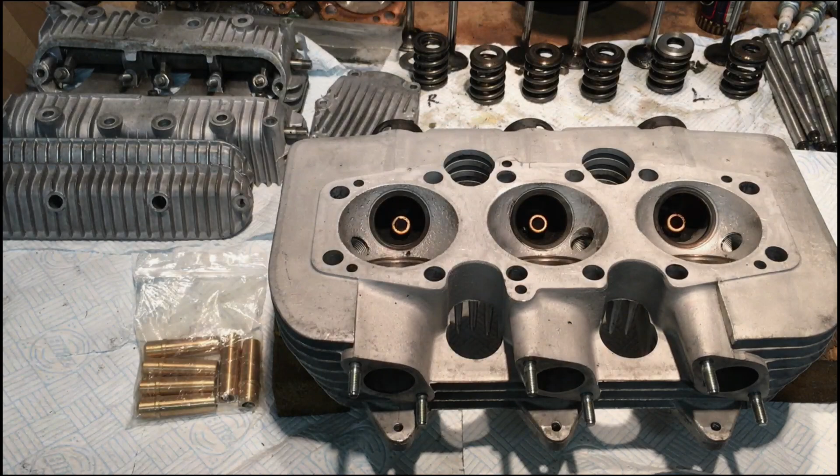Right, back on with the Rocket 3 top end rebuild, part 3. So on Friday the barrels went in to be rebored as recommended by Richard Darby, and the name of the company is Willenhall Engine Centre, at a place called Willenhall and Bilston in Wolverhampton, and they should be ready towards the end of this week. So in the meantime, we'll carry on with the head and rocker boxes.

So firstly, the rocker boxes and rocker covers have had a good bath in the ultrasonic cleaner, together with the sump plate. Actually, I took that off because the engine does sump, so we cleared all that lot out. And first thing we'll do tonight is we'll get some new valve guides into the cylinder head. So the oven's on at 200 degrees centigrade, which is about gas mark 8, I think.

And we'll put the valve guides into the freezer for the same length of time, and we've got sort of hammers and drifts ready to knock these out and hopefully get the others in, and hope that the old welding gloves will be good enough to carry this between the kitchen and the garage. Otherwise there's going to be disaster. And before you say anything, this has the full approval of my wife. So let's get on with it.

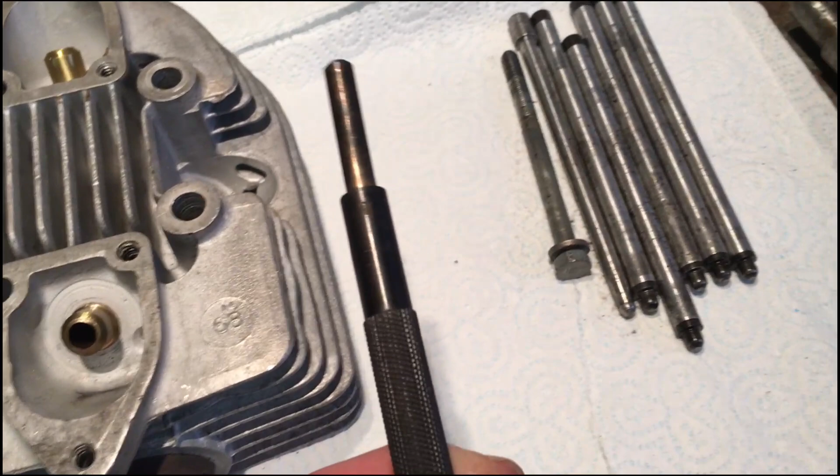Okay, that's the old valve guides out and the new ones in, but my god, they took some putting in. I heated the head to actually 240 degrees centigrade, and these took some welting out and in with, luckily, the proper drift, but you can see I've somehow slightly bent that, and the ends had a really good welt. They were tough. I've done plenty of cylinder heads in the past, including triples, but god, these were tight.

So what we'll do next is we'll just check these against the valve stems, because I've got a funny feeling that as these are so tight we might need to slightly ream these out, but we'll see how we get on.

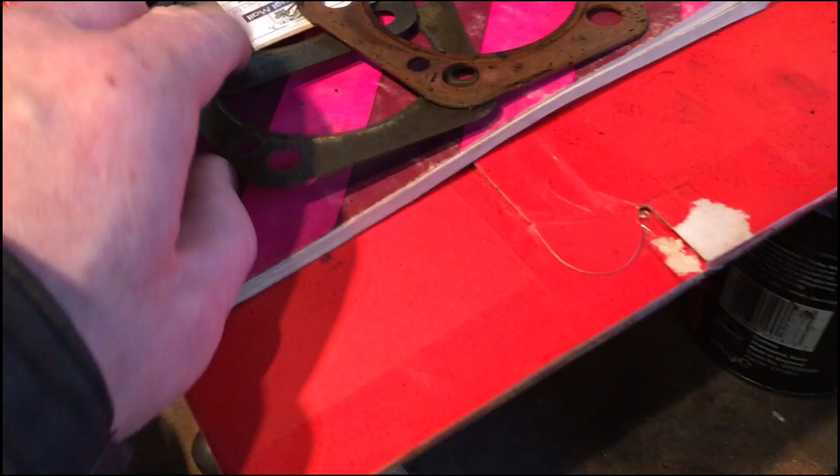Other thing to report is that one or two bits and pieces have recently turned up in the post. Now that includes what we were talking about earlier, and these are the original style head gaskets, and thanks to everybody that commented upon these and associated matters with respect to composite head gaskets and thick copper ones.

Now we've trued up the head faces, and also in conjunction with talking to the engineers and one or two comments as well on the previous film about the fact that the barrels look good and the liners sitting slightly proud of the barrels, then I am going to use this.

But the thing to bear in mind is actually sealing the oil drain holes, which are these from each of the valve spring recesses, which go all the way down the barrels. And I was wondering whether these actually lubricated probably the cams, but certainly not the cam followers, because that's done through the pushrod tubes.

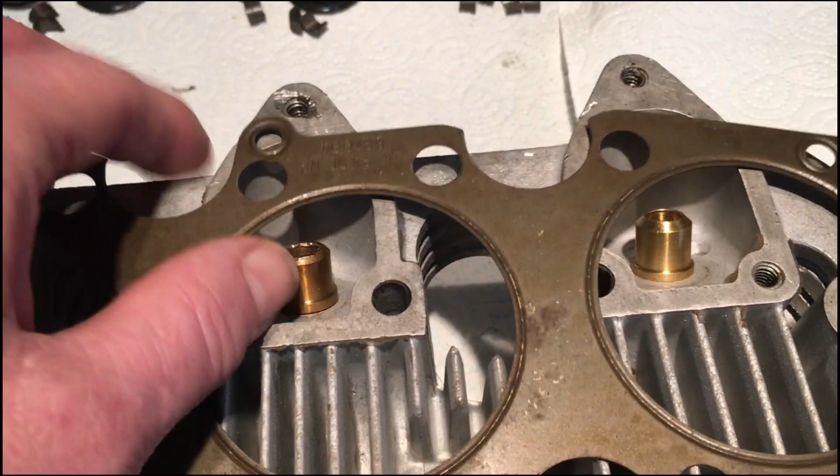But anyway, the key point is that you can see these are rolled. You can't see it very well from the side, but there you go. They've been press rolled so that they try and achieve a bit of a seal, because that can be a bit of a problem. So anyway, I'm going to give it a go, and I know some people say, oh, whatever, but they did fit these to Rocket 3s from when they first started manufacturing in late 68 to 71. So we'll give it a go. I've decided I'm going to do that.

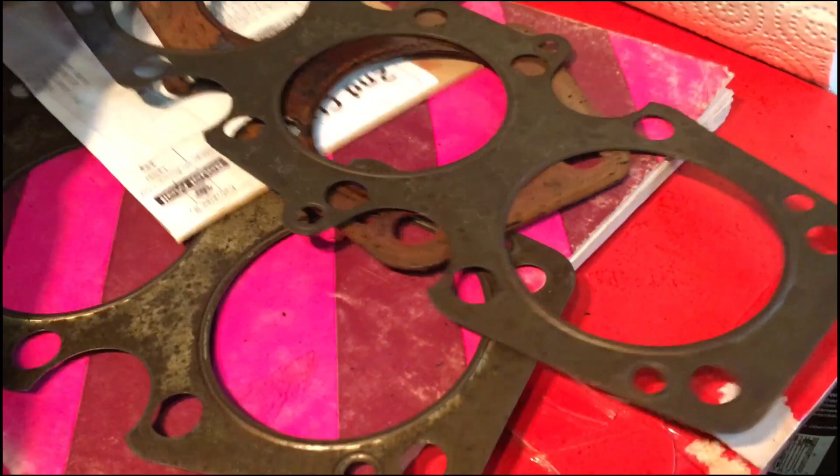Also, the full sealed gasket set only had one of the sump plate gaskets, because you need 2 of these.

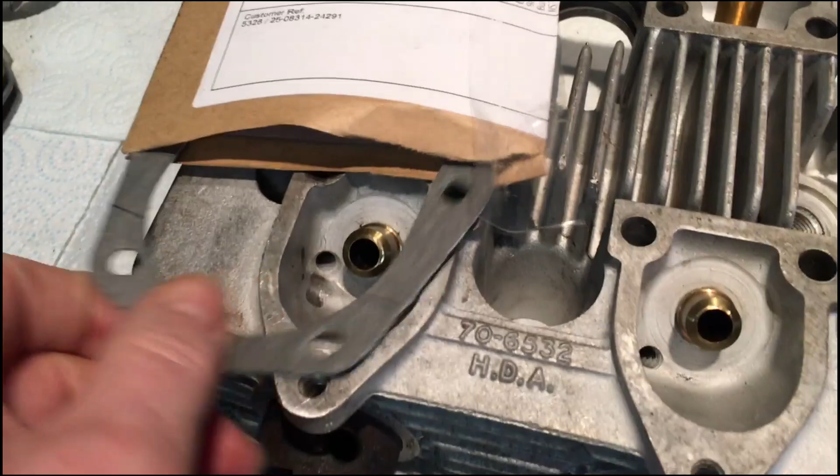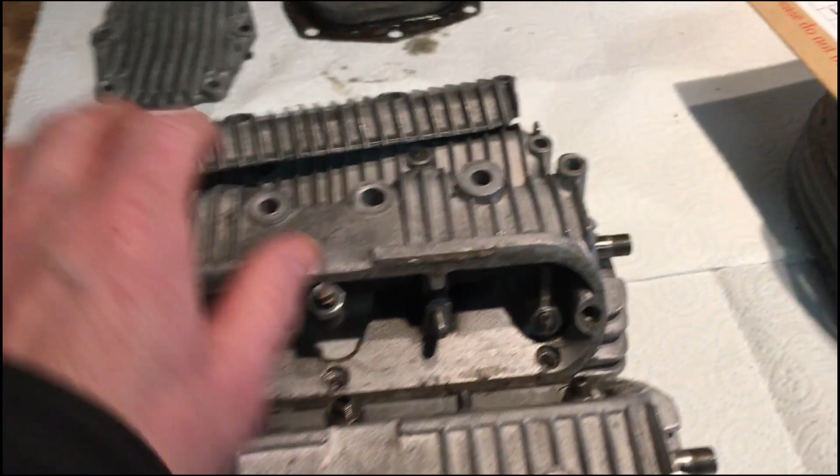Two of those, one to go either side of the gauze filter underneath the plate. That needs a bit more of a clean up yet, but that'll clean up okay. And the other thing that I've done is these rocker boxes and rocker covers have had a bath in the ultrasonic cleaner, and they don't look too bad at all. I might polish up the fins a little bit more when we put it back together.

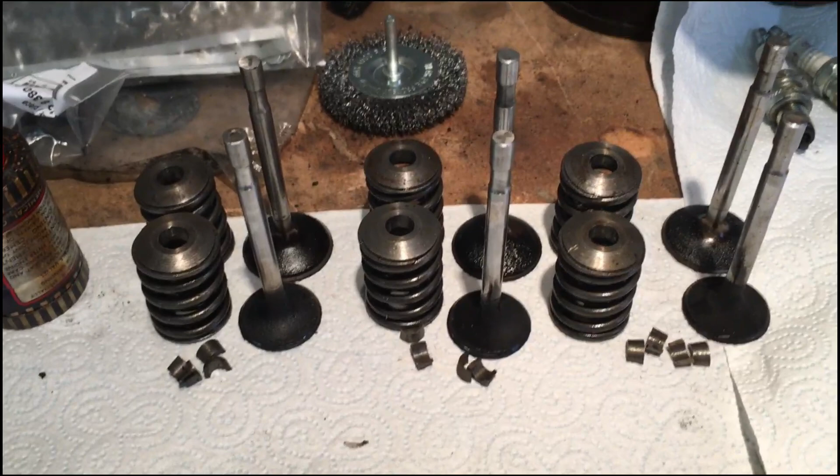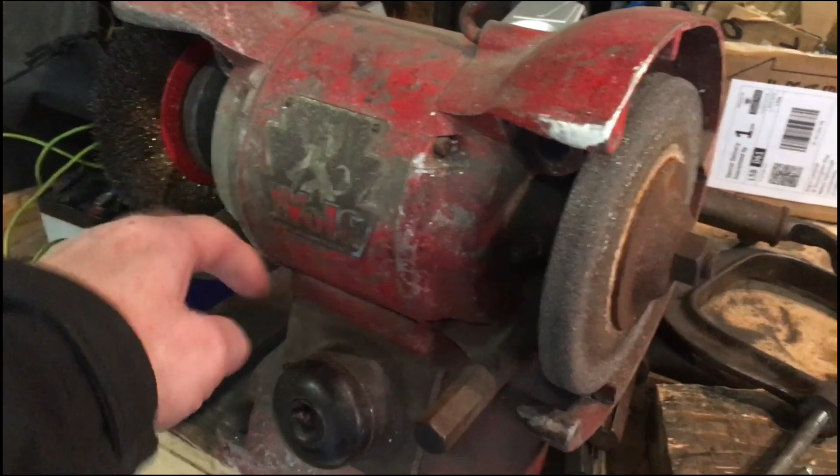Right, so next job then is to clean up the valves, check these in the guides, and then just grind them in with grinding paste. I'm not going to show the grinding in on film or the cleaning. I'll just wire wheel these on the bench grinder. It's great for that. But I'll hand grind these in using the old trusty tool, and the actual seats on the valves and the head are actually pretty good. They're not really pitted at all, so they're not going to take much grinding in.

And what I usually use is the coarse grinding paste so that you get sort of a nice rough surface that will probably seal better, obviously, on both surfaces. Right, but first of all, let's see how these valve stems fit in these newly fitted valve guides, and see whether or not we need to ream it out. It's now Sunday, and I'm expecting to get a call from the engineers tomorrow to say that the barrels are bored. So we're getting there.

Well, the valves are cleaned up really well, and hopefully, as you can see, we can get this to focus. Not very well. There we go. They've been sealing quite well actually, and there's still a slight rough finish on them, so they've been ground in before, which is fine, which is what we want. But checking them in the guides, and as expected, there are a couple of guides that are too tight.

So I've got some adjustable reamers on the way, and I'll just read up on the specs, which I think are in the workshop manual, regarding the clearances. I think it's 2 to 3 thou on each, and the valve stems are usually about 310 thou, I think. So people are stating that it's around about a 5/16 reamer required for these, but because I've got adjustable reamers coming, we can be quite accurate with these.

And I'm not surprised that one or two are tight, especially the centre ones, because they took a lot of drifting in. I know that sometimes it's better to try and press these in, or use the correct tool to draw them in on a thread, but I just can't get hold of the correct tool at all to do that, which I would have preferred, so I had to drift them in. But anyway, I think we're going to be okay. But let's have a quick look in the workshop manual.

Right, there we go in the workshop manual. Valve guide, bore diameter, inlet and exhaust, 312.2 thou to 312.9 thou, and I believe that 5/16 is 312.5 thou. So I'll just check that, and I'll set a reamer up to suit.

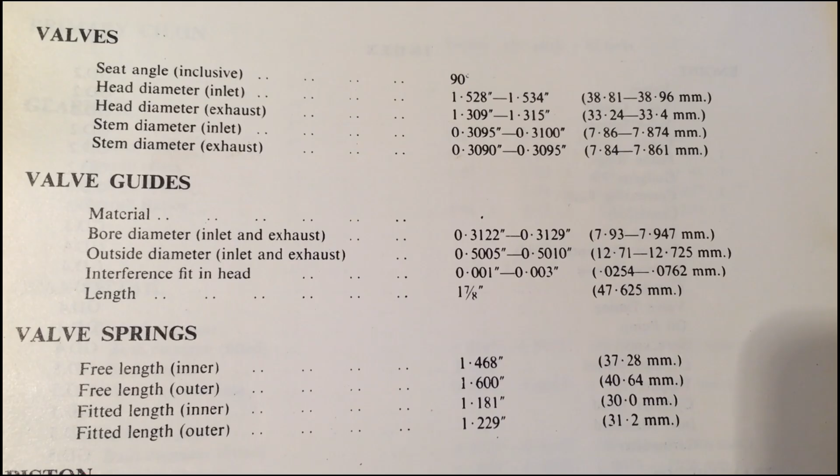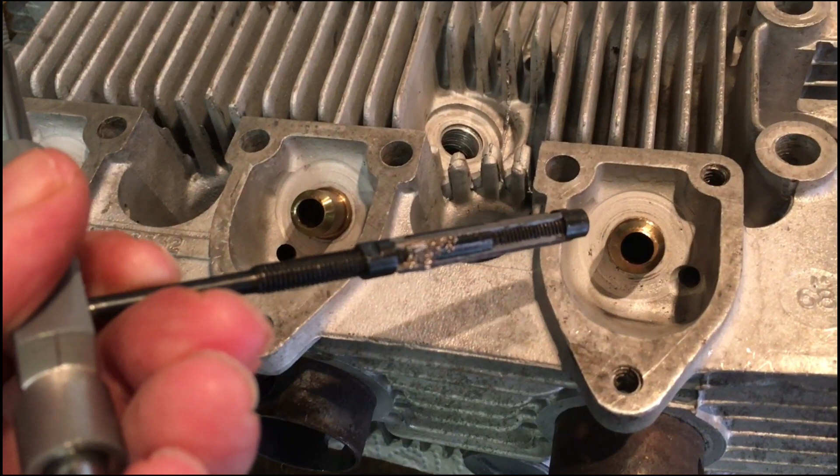Okay, the reamer's working a treat actually. Just running it in gently by hand and bringing it out, and you can see that. Let's just get it focused a bit. There we go. It's removed some metal. So we'll gently go along all of these. The centre ones are the worst. They've been compressed a bit, but we'll sort these out and make sure all the valves are a snug fit, and then we'll get on to lapping in the valves. But anyway, yeah, pleased with these, going well.

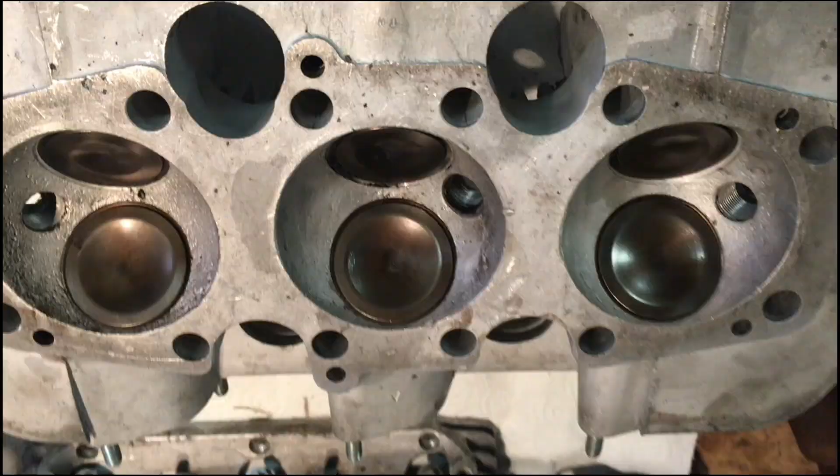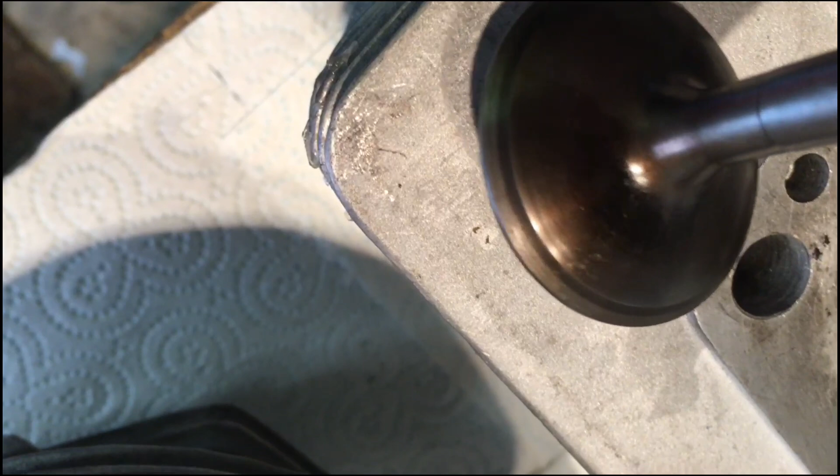Right, that's that job done. It didn't take too long at all. So all the valves are in. They move nicely, and hardly any discernible side-to-side play. Just a little tiny bit. There's supposed to be 1 to 3 thou. So that all feels good. So what I'm going to do now is just quickly lap these in. The mating surfaces, it's not going to show up very well, is it? But there we go. They're really very good, actually.

You can almost see actually that these have been ground before, really, because it's not done many miles, only 1,000 probably. So these are only going to need a quick go, and because of the state of my joints at the minute, I'm not going to use the old hand lapping tool down there. I'm going to use the modern way of putting a drill on the back and just giving them a quick zip.

And then what I'll do is replace the valves with the springs, and then, actually, before I do that, I'll give this lot a good bath. That's what we'll do. So anyway, I'll stop waffling on, and let's get these ground in.

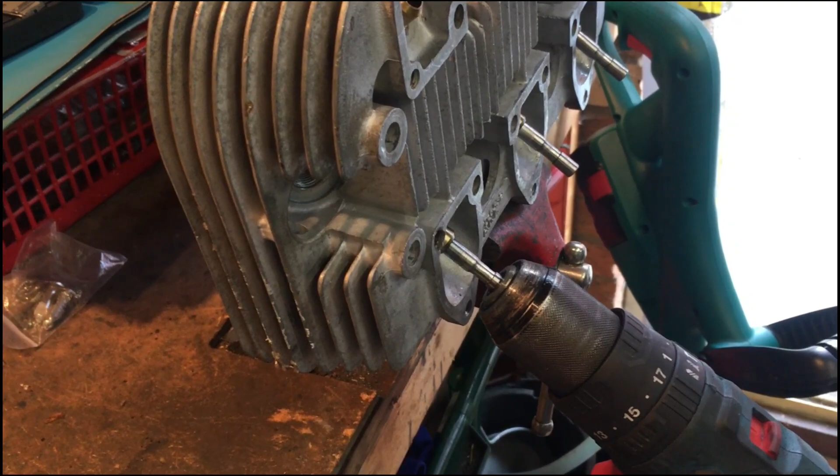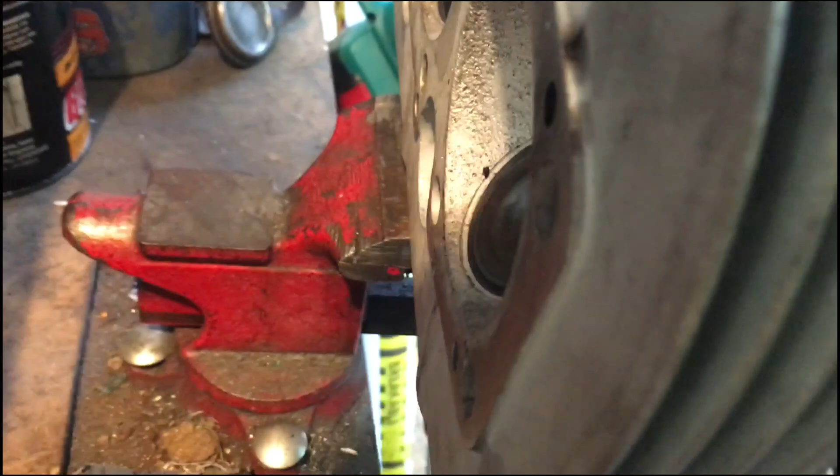So I'm sure most of you have done this before, but as I say, the quick and dirty technique is drill on the end of the valve, and then you've got to have enough room just to be able to raise the valve. Put a little tiny thin smear of coarse, because I want a rougher surface. Should give a better seal. And then just rotate it in one direction then the other, and just lift it occasionally. And change direction.

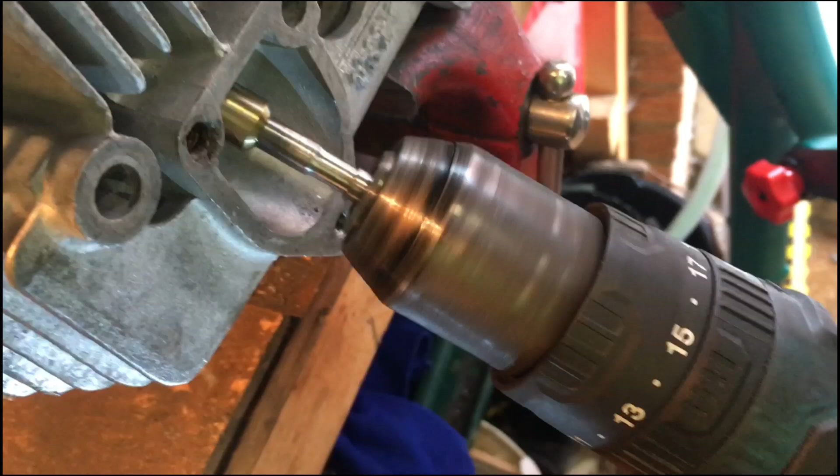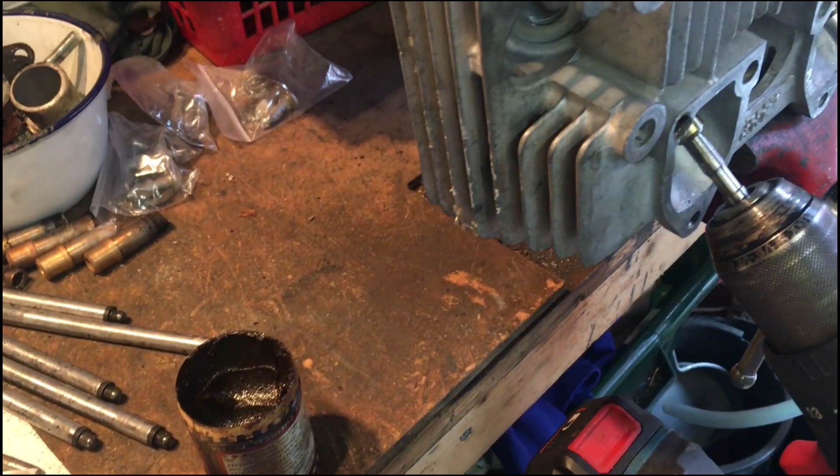And then we'll take it off and have a check, and then if it requires any more, you just do another bit of a smear of grinding paste, and we'll take it from there. But let's have a quick look at that one now. I've given it about 2 or 3 goes at the same sort of cycle that I've just shown you.

There we go. So that's cleaned it up relatively nicely, but you can just see there one little tiny pit. So we'll just give that one more go, just to clean that a little more. But in general, that looks nice across the whole of the contact surface, and that's the same with the seat as well, so it's not going to take much.

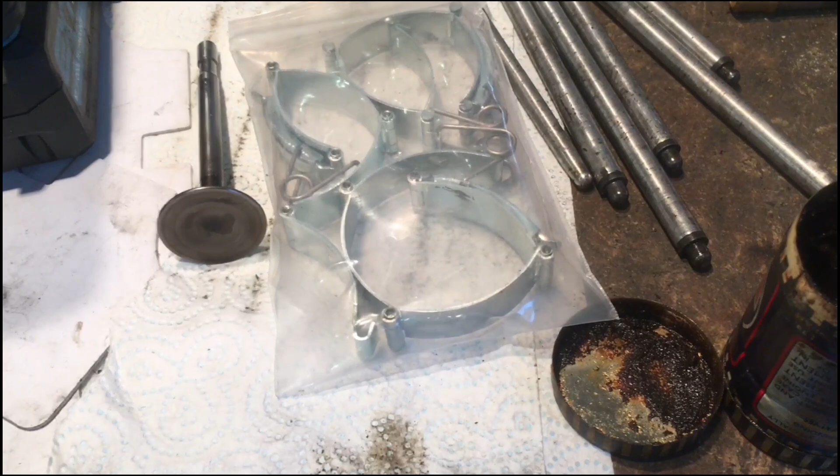So I'll repeat it on this one, and then we'll go all the way through the rest of them, and then we'll get her in the bath again, clean everything up, and then we'll install the valves and the springs.

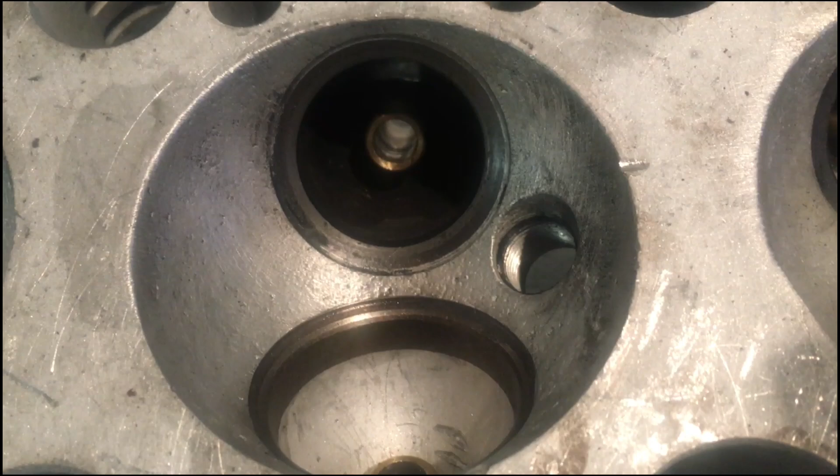Bit difficult to see, I know, but all done, and I'm pretty happy with those. We'll see what they're like after the bath, but I think they're fine. As I say, they didn't need much doing anyway, and that was the general observation when I took them apart. They were all seating well anyway, by the looks of it.

Right, there we go. Head complete. All the valves in. I've just got to put the inlet stubs on the back with new gaskets, but with the original Bakelite, or some people call it Tufnol, insulation washer in the middle, and just got the barrels out of the bath as well. So we're all ready to go then for the build.